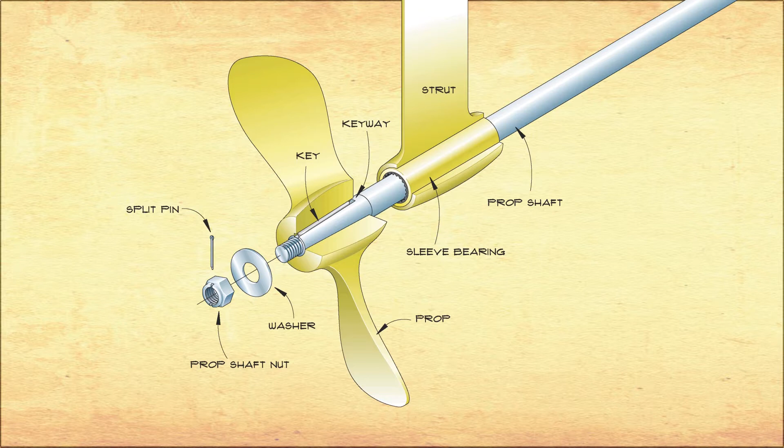Let's take a closer look at the prop shaft. As the shaft passes through the strut, it's supported by a sleeve bearing. Looking closer, we'll find it's a brass sleeve with a hard rubber ribbed insert. The ribs allow the water to flow through, lubricating the bearing.

As the rubber ribs wear, the prop shaft is allowed to rattle around, causing a hammering or clunking noise as you motor. To remove the bearing, loosen the set screws and slide the bearing out. Seems simple enough, doesn't it?

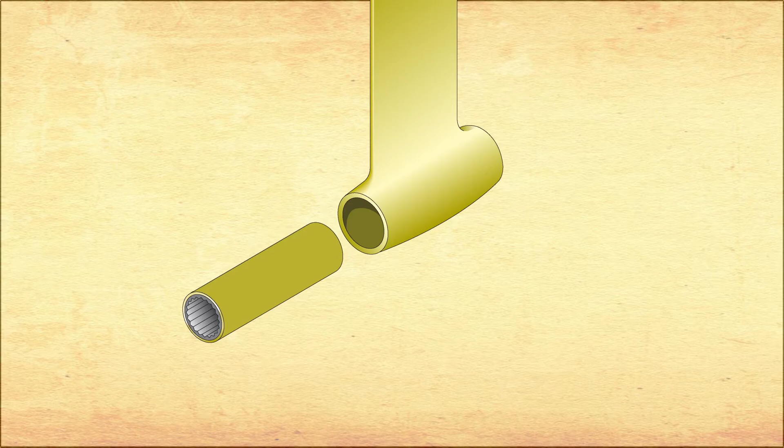The traditional way of removing the bearing requires pulling the prop shaft, followed by forcing the bearing out with a gear puller. Pulling the prop shaft can be a difficult job, so we came up with a simple jig that pushes the bearing out with the shaft in place. The idea is to make a sleeve that pushes the bearing out.

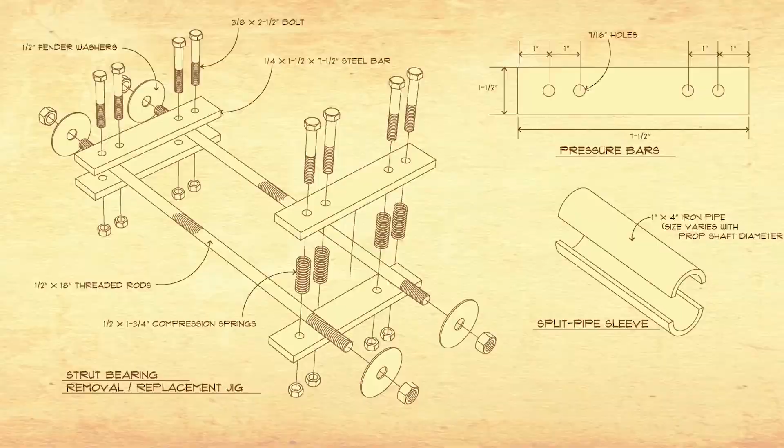The jig consists of 4 flat bars, 2 pieces of all-threaded rod, a 4-inch long section of pipe that gets split in half with a hacksaw, bolts, nuts, washers, and 4 springs. Place the split pipe onto the forward side of the shaft. Temporarily secure the 2 pieces of pipe with zip ties.

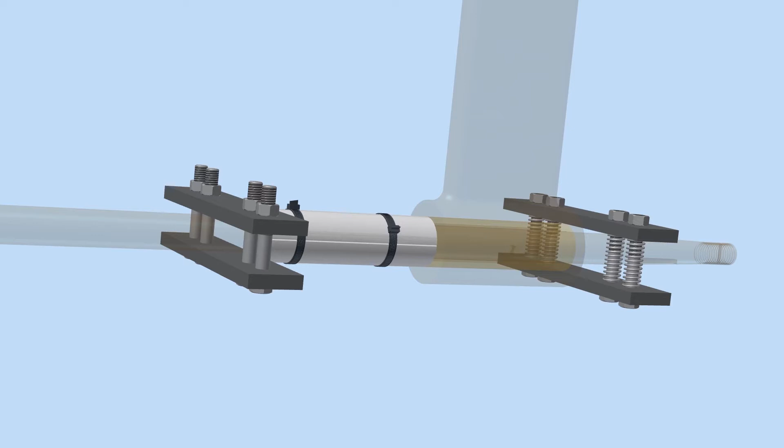The 2 flat bars in the forward section are placed in front of the pipe and secured firmly against the prop shaft with bolts and nuts. The 2 flat bars in the rear are placed just behind the strut. They're bolted together as well, but have springs between the plates to allow the strut bearing to clear the plates as it gets pushed out. Join the 2 sets of plates together with 2 all-thread rods, nuts, and washers.

Now you're ready to remove the bearing. As you tighten the bolts on the all-thread rods, the split pipe begins to push the bearing out. Continue tightening the bolts until the bearing has been completely removed and pushed out.

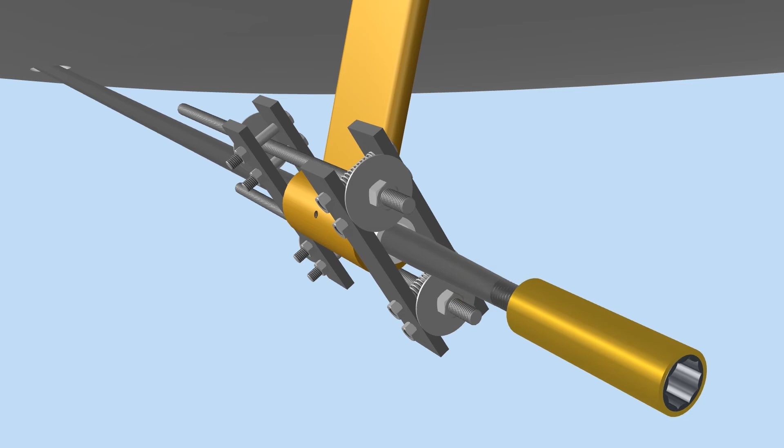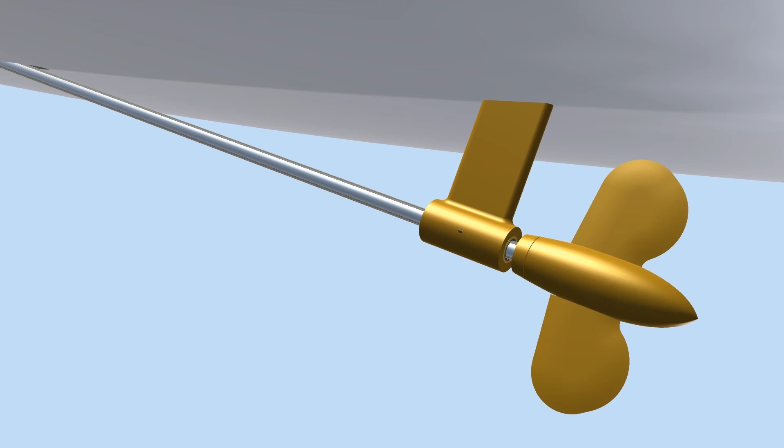To replace the bearing, loosen the threaded rods. Notice the aft plates are now closer together where they just fit over the prop shaft as the bearing is pressed in place. Once the bearing is fully in place, remove the jig and replace the set screws. Replace the prop and you're ready for some smooth motoring.